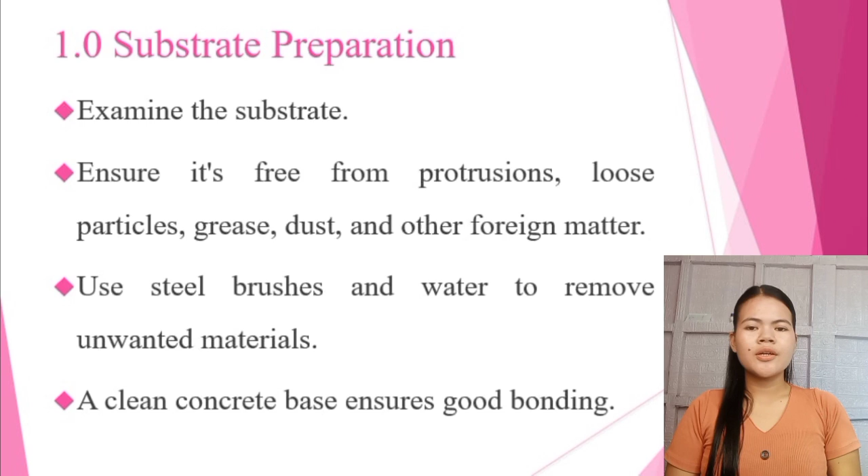Use steel brushes and water to remove unwanted materials. Use steel brushes, water, and simple cleaning tools to remove dirt and loose particles. A clean concrete base ensures good bonding. A clean and smooth surface allows the mortar to stick better and helps prevent tile detachment in the future.

Second, leveling the concrete base. Establish the correct level of the concrete base. Tiles must be placed on a level and properly sloped surface. Use existing elevation marks as references for floor tile installation. Check the correct height or level of the floor using marks or reference points in the room.

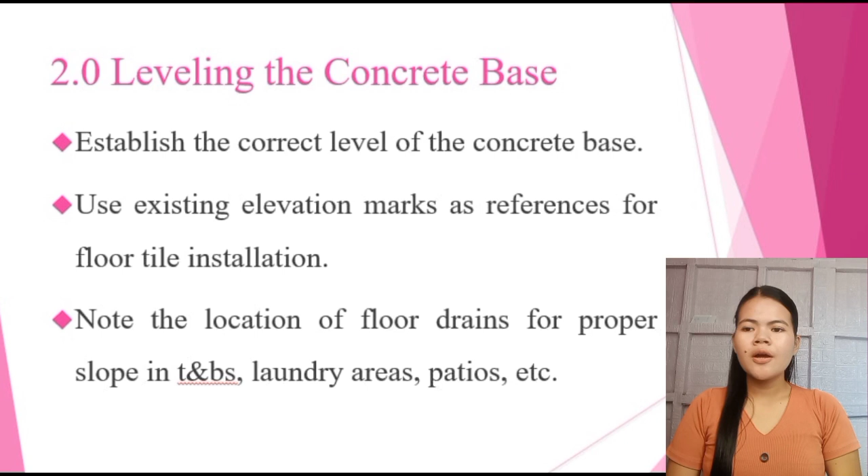Note the location of floor drains for proper slope in T&Bs, laundry areas, patios, etc. This is important so that the entire floor will look even once the tiles are installed. For areas like bathrooms, laundry rooms, and patios, consider the direction of water flow. The floor must be slightly sloped toward the floor drain to avoid flooding.

Use nylon strings and leveling bars as reference lines. These serve as guides to maintain accurate height. Mortar buttons are effective for surface level check. Mortar buttons can also be used to check and control the level as you install tiles.

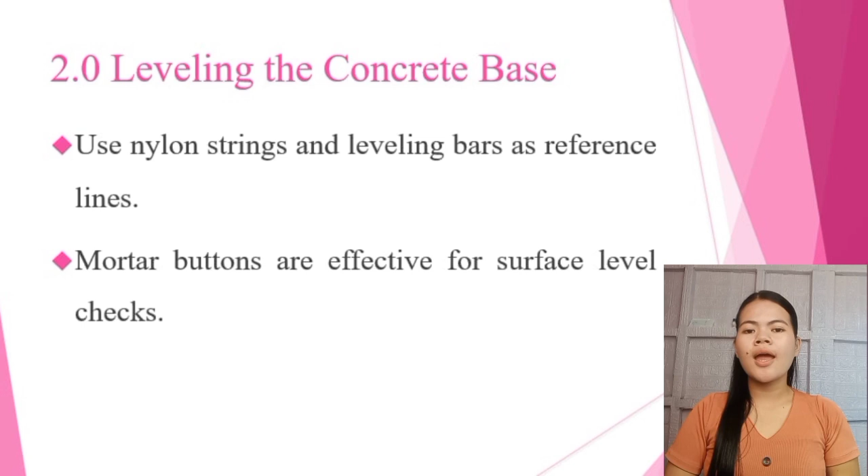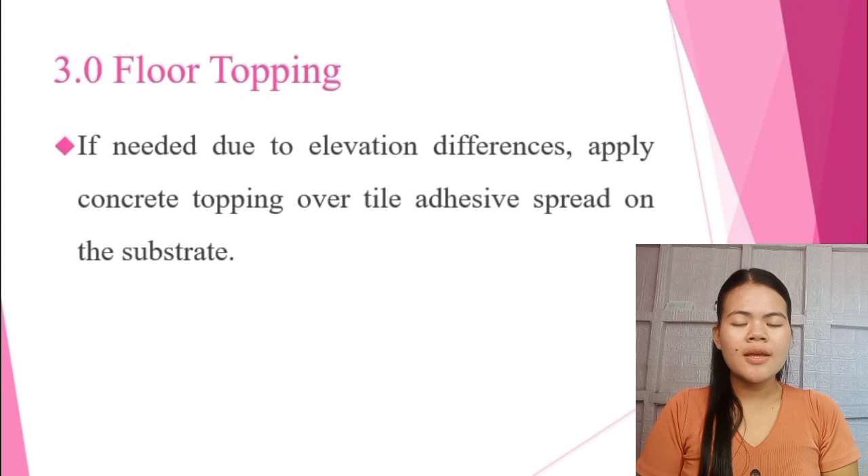Third, floor topping. If needed due to elevation differences, apply concrete topping over tile adhesive spread on the substrate. Sometimes the floor is too low or uneven. If this happens, apply a concrete topping to raise or smoothen the surface. Before placing the topping, spread a thin layer of tile adhesive on the substrate to help the new concrete bond well. This step ensures the tiles will set on an even surface and prevent cracks.

Fourth, mortar mixing and usage. Mixing can be done manually. Add tile adhesive and cement in proportional volumes or weights to clean water. Prepare a mixture usable within 3 to 4 hours. Stir with a mixing tool, not by hand. Proper mixing is important for strong bonding.

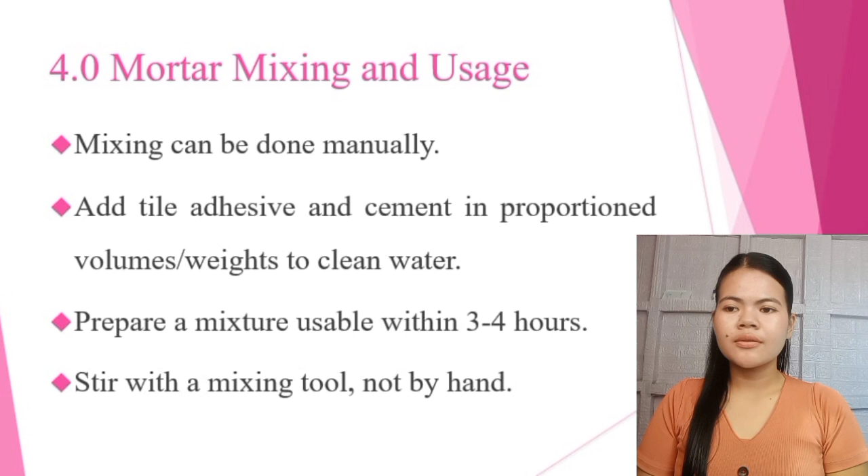You can mix mortar manually using a clean bucket and tools. Combine tile adhesive, cement, and clean water in the right proportions. Mix until the texture is smooth and free of lumps. Let the mixture stand for 15 minutes, then mix briefly again.

Open time: 15 minutes, the time after mortar is applied. Pot life: 3 to 4 hours, the time from mixing completion until expiration. Check mortar plasticity by testing its stickiness. Never use expired mortar or mix old with new.

So let the mortar rest for 15 minutes after the first mixing. This helps the ingredients activate. And mix again briefly before using. Only prepare enough mortar that you can use within 3 to 4 hours, and this is called the pot life.

Once spread on the floor, you have only 15 minutes to place the tiles before the mortar starts to dry. Open time. Always check if the mortar is still sticky. If it is no longer sticky, do not use it. Never mix old mortar with new because it weakens the tile bond.

Fifth, concrete base wetting. Lightly wet the concrete surface, especially in high temperature or strong winds. The concrete must not be too dry. Lightly wet the surface with water, especially during hot weather or strong winds. This prevents the concrete from absorbing water too quickly from the mortar. If the mortar dries too fast, the tiles will not bond well and may loosen over time.

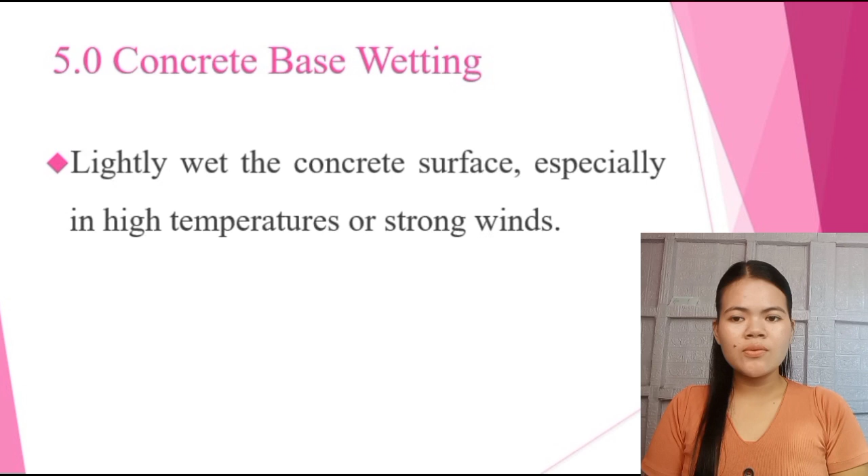Sixth, tile handling. Do not soak tiles in water. Ensure the underside is free from unwanted materials. For 4.5 by 4.5 tiles, dip lightly in water and stack vertically to remove excess water. Clean tiles create a stronger bond. Do not soak tiles for a long time because this can affect their quality.

Simply make sure the underside of each tile is clean with no dust or powder. For small tiles, like 4.5 by 4.5, you may dip them lightly in water to remove dust, then stand them up vertically so excess water can drain. Dry or lightly moist tiles help the mortar grip better.

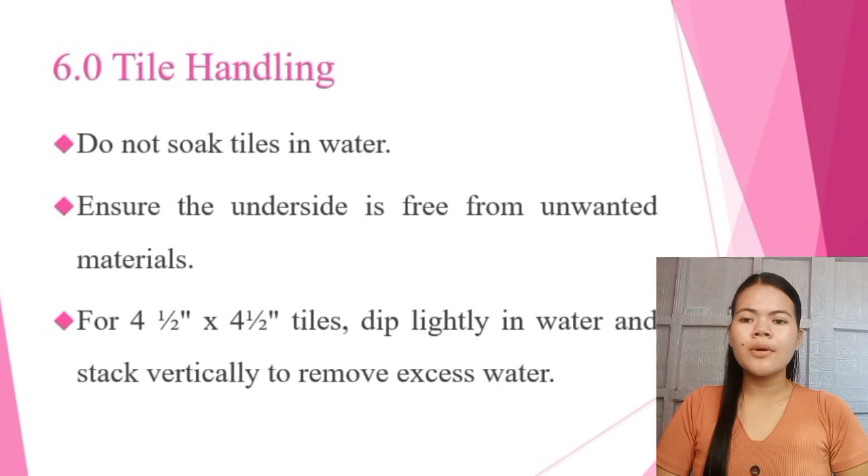Seventh, mortar application. Apply tile bedding mortar to the concrete base, not the tile underside. Avoid the buttering method. Apply mortar on the concrete base, mortar spreading area, and combing the mortar. And this is how you properly place mortar on the surface. Always spread mortar on the concrete base, not on the back of the tile. Avoid the buttering method because it does not give full and even coverage.

Work in small sections, only 1 to 2 square meters at a time, to keep the mortar fresh. The recommended thickness of the mortar bed is 6 mm or equal to the depth of your notched trowel. Use a notched steel trowel to comb the mortar. The trowel's teeth create ridges that help the tile settle evenly.

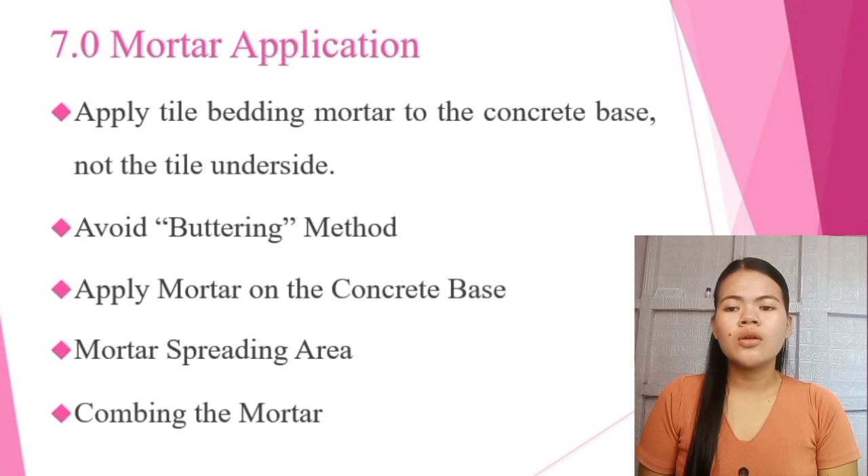Make sure the tips of the notches touch the concrete so the mortar spreads evenly without hollow spaces. This step ensures that the tile will have full support underneath. Eighth, fixing the tiles. Install the tiles within 15 minutes before the mortar's open time expires. And this is the actual placement of tiles. You must install the tiles within 15 minutes after spreading the mortar.

Place the tile carefully on top of the mortar bed. Press it down firmly and move it slightly left or right. This movement helps spread the mortar and ensure that the tile is fully covered underneath. This prevents hollow sounds and avoids tile detachment later. Always check alignment using tile spacers and reference lines.

And the continuation of tile setting essentials will be reported by Ronquillo and Tikal.